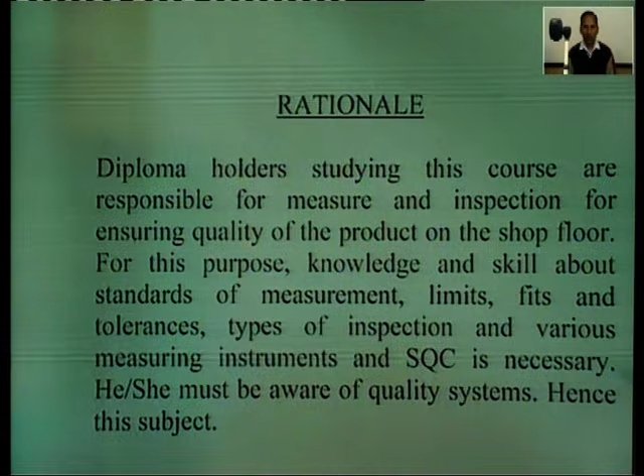So if we discuss the rationale of this subject, that is why this subject is important for the students of production and industrial engineering, then the diploma holders studying this course are responsible for measurement and inspection for ensuring quality of the product on the shop floor. For this purpose, knowledge and skill about standards of measurement, limits, fits and tolerances, types of inspection and various measuring instruments and SQC, meaning statistical quality control, is necessary. He or she must be aware of the quality system, hence this subject.

So the first topic is inspection. What is inspection? An inspection is most generally an organized examination or formal evaluation exercise. In engineering activities, inspection involves the measurements, tests and gauges applied to certain characteristics in regards to an object or activity. The results are usually compared to specified requirements and standards for determining whether the item or activity is in line with these targets. So inspections are usually non-destructive.

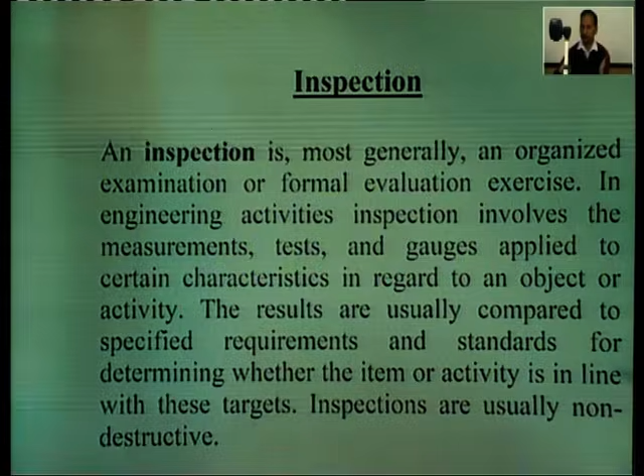A surprise inspection tends to have different results than an announced inspection. Leaders wanting to know how others in their organization perform can drop in without warning to see directly what happens. If an inspection is made known in advance, it can give people a chance to cover up or fix their mistakes, which could lead to distorted and inaccurate findings. A surprise inspection therefore gives inspectors a better picture of the typical state of the inspected object or process than an announced inspection. It also enhances external confidence in the inspection process.

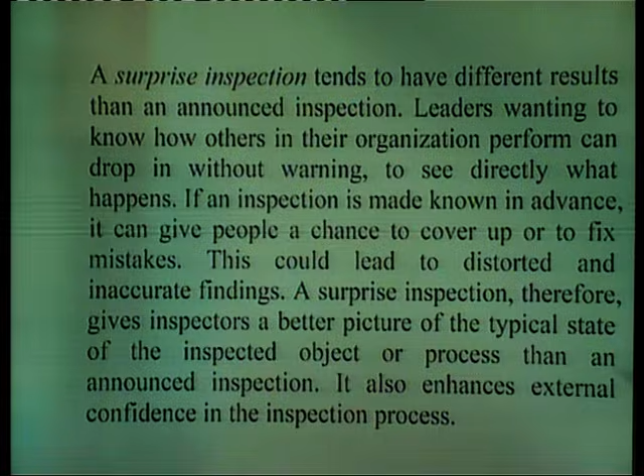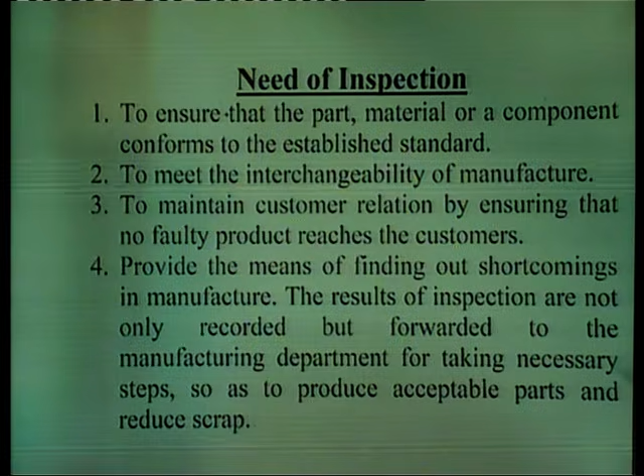Need of inspection, that is why inspection is needed in the industry. First, to ensure that the part, material or component conforms to the established standards. Second, to meet the interchangeability of manufacture. Third, to maintain customer relations by ensuring that no faulty product reaches the customers. Fourth, to provide the means of finding out shortcomings in manufacture. The results of inspection are not only recorded but forwarded to the manufacturing department for taking necessary steps so as to produce acceptable parts and reduce the scrap.

Fifth, it also helps to purchase good quality raw materials, tools and equipment which govern the quality of the finished products. Sixth, it also helps to coordinate the function of quality control, production, purchasing and other departments of the organization. Seventh, to take decisions on the defective parts, that is, to judge the possibility of making some of these parts acceptable after minor repairs.

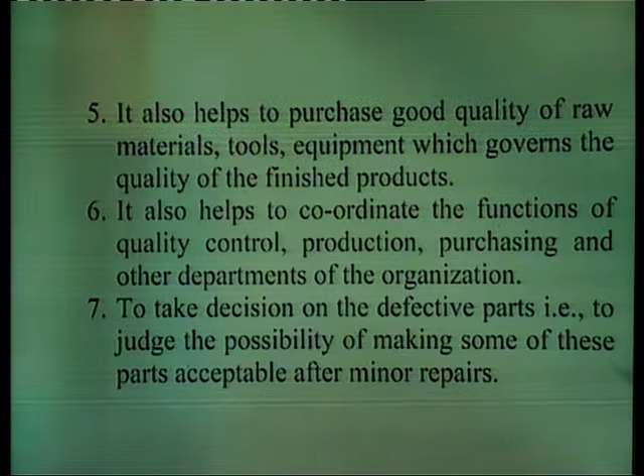The various units of measurement. A unit of measurement is a definite magnitude of a physical quantity, defined and adopted by convention and/or by law, that is used as a standard for measurement of the same physical quantity. Any other value of the physical quantity can be expressed as a simple multiple of the unit of measurement. For example, length is a physical quantity and the meter is a unit of length that represents a definite predetermined length.

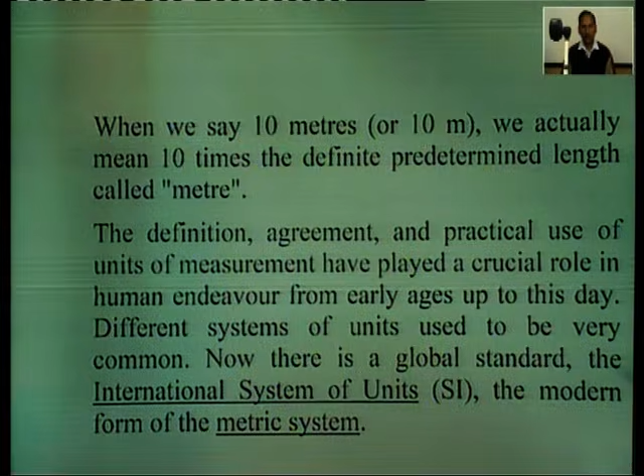So when we say 10 meters, we actually mean 10 times the definite predetermined length called the meter. The definition, agreement and practical use of units of measurement have played a crucial role in human endeavor from early ages up to this day. Different systems of units used to be very common. Now there is a global standard, the International System of Units, shortly named SI units, the modern form of the metric system which we are generally using in the industry.

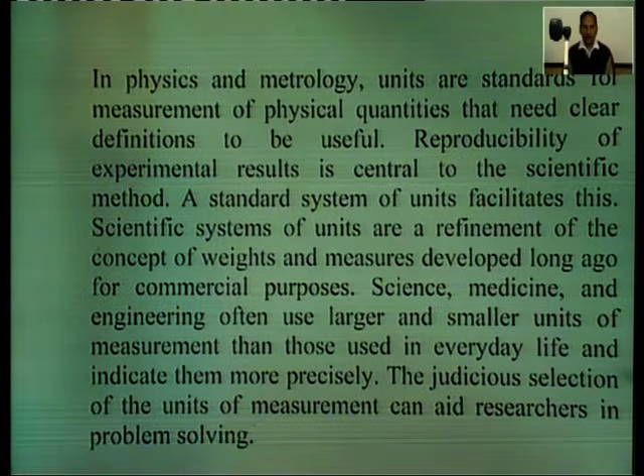In physical and metrological terms, units are standards for measurement of physical quantities that need clear definitions to be useful. Reproducibility of experimental results is central to the scientific method. A standard system of units facilitates this. Scientific systems of units are a refinement of the concept of weights and measures developed long ago for commercial purposes. Science, medicine and engineering often use larger and smaller units of measurement than those used in everyday life, to indicate them more precisely. The judicious selection of units of measurement can aid researchers in the problem-solving process.

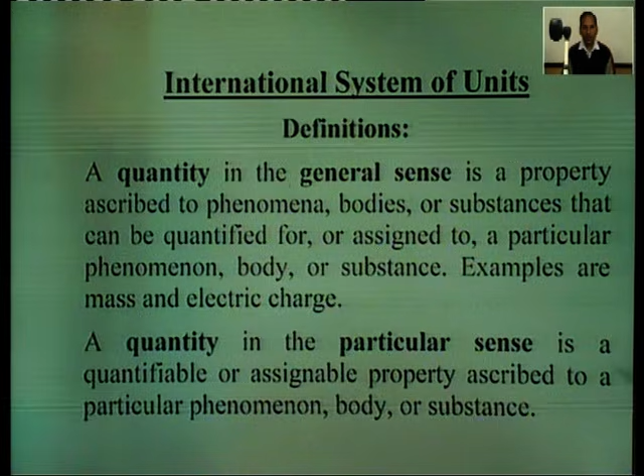So, international system of units. If we define this international system of units, the definition is: a quantity in the general sense is a property ascribed to phenomena, bodies or substances that can be quantified or assigned to a particular phenomenon, body or substance. Examples are mass and electric charge. A quantity in the particular sense is a quantifiable or assignable property ascribed to a particular phenomenon, body or substance.

Examples are the mass of the moon and the electric charge of the proton. A physical quantity is a quantity that can be used in the mathematical equations of science and technology. A unit is a particular physical quantity, defined and adopted by convention, with which particular quantities of the same kind are compared to express their values.

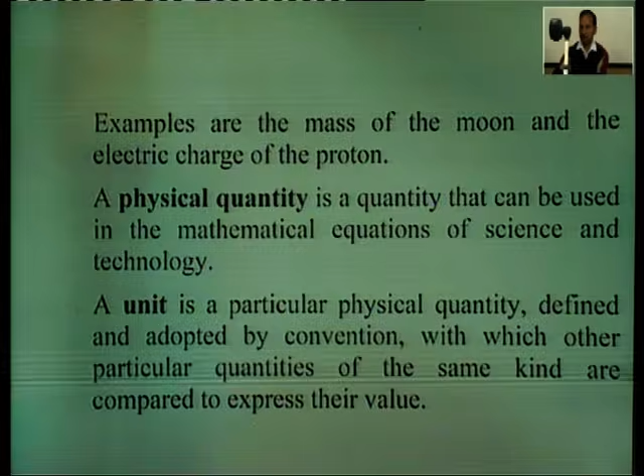Similarly, base quantity electric current has name ampere and symbol capital A. Base quantity temperature has name Kelvin and symbol capital K. Base quantity amount of substance has name mole and symbol mol. Similarly, base quantity luminous intensity has name candela and symbol small cd.

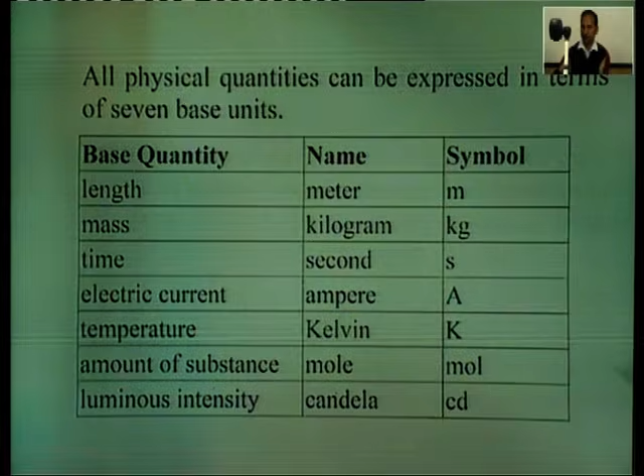Derived units: other quantities, called derived quantities, are defined in terms of the 7 base quantities via a system of quantity equations. The SI derived units of these derived quantities are obtained from these equations and the 7 SI base units. Examples of such SI derived units are given, where it should be noted that the symbol 1 for quantities of dimension 1, such as mass fraction, is generally omitted.

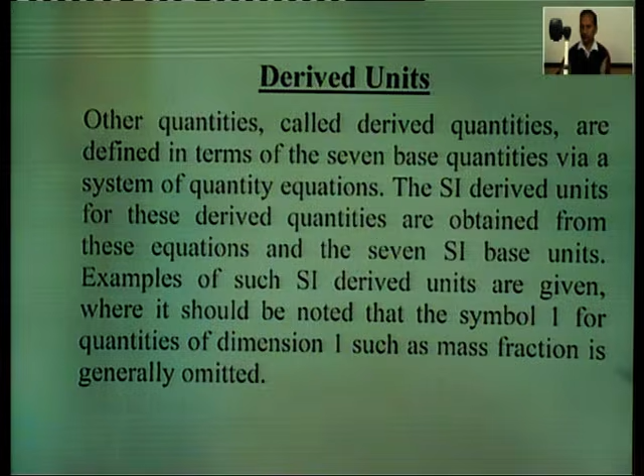Derived quantity area: name is square meters, expression in terms of SI units is small m square. Similarly, derived quantity volume: name is cubic meter, expression in terms of SI units is small m cube.

Derived quantity speed or velocity: name is meter per second, expression in SI units is small m oblique small s. Similarly, derived quantity acceleration: name is meter per second squared, expression in SI units is small m oblique small s square.

Similarly, derived quantity mass density: name is kilogram per cubic meter, and expression in terms of SI units is kg per m cube.

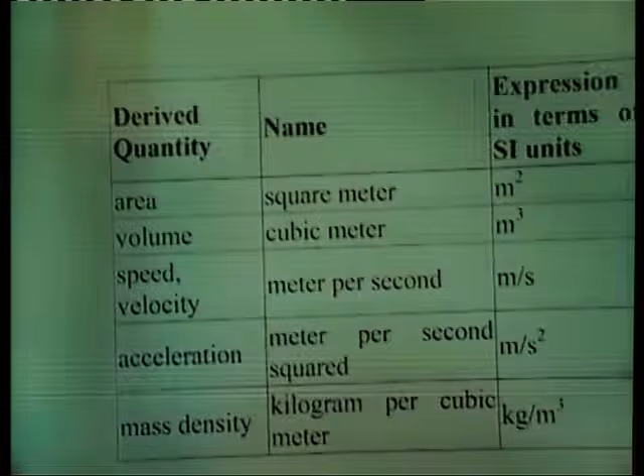Similarly, derived quantity force: name is newton or capital N, and expression in terms of SI units is m kg s raised to power minus 2.

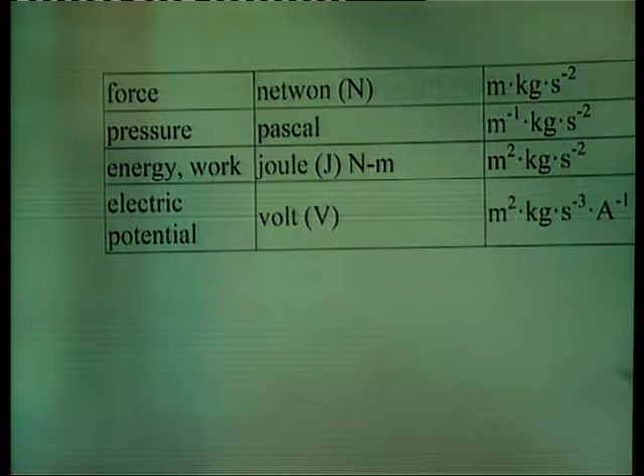Pressure: name is Pascal, symbol is small m minus 1 kg s square minus 2. Energy/work: name is joule or J, Newton meter, symbol is m square kg s raised to power minus 2. Similarly, electric potential: name is volt, capital V, symbol is m square kg s raised to power minus 3 capital A raised to power minus 1.

Standards of measurement: the laws of physics are expressed as mathematical relationships among physical quantities. Most of these quantities are derived quantities, or they can be expressed as combinations of some basic quantities. There are mainly 3 quantities in physics or mechanics: length, mass, and time.

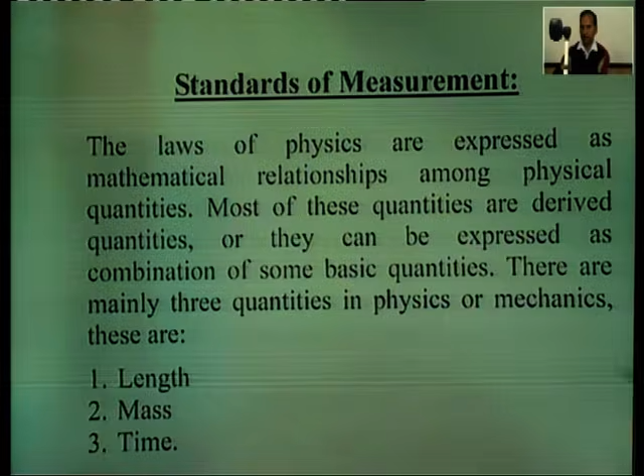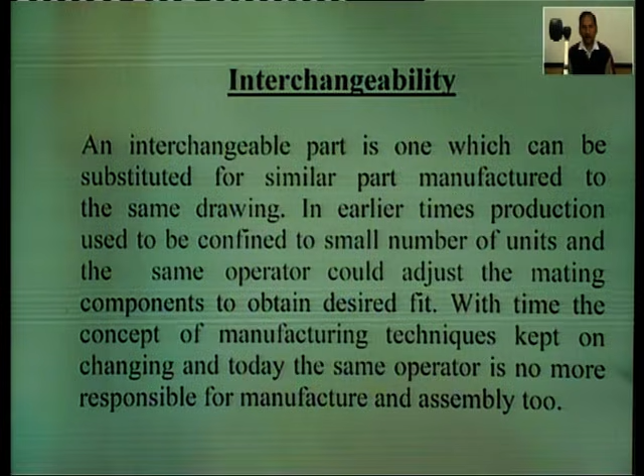With an economic-oriented approach, mass production techniques were inevitable, leading to breaking up a complete process into several smaller activities, which led to specialization. As a result, various mating components come from several shops, and even a small component would undergo production on several machines. Under such conditions, it becomes absolutely essential to have strict control over the dimensions of portions that have to match with other parts.

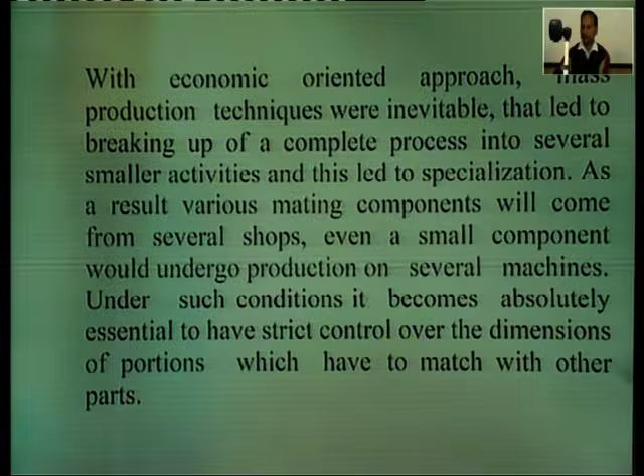So any one component selected at random should assemble correctly with any other mating component in the production line, also selected at random. When a system of this kind is ensured, it is known as an interchangeable system. Interchangeability ensures increased output with reduced production cost.

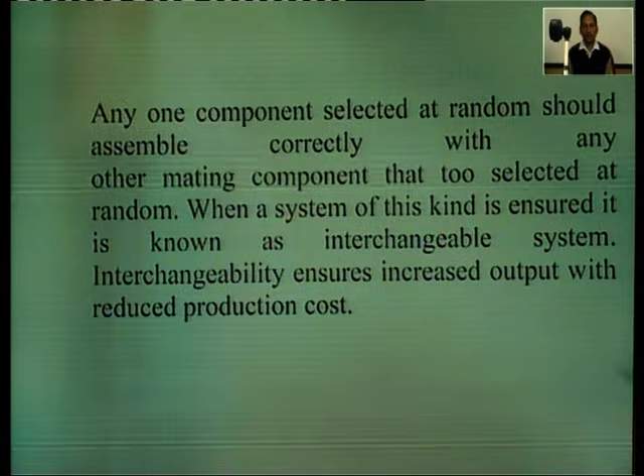Accuracy and precision: what is accuracy, what is precision, and what is the difference between the two? Accuracy is how close a measured value is to the actual or true value. Precision is how close the measured values are to each other.

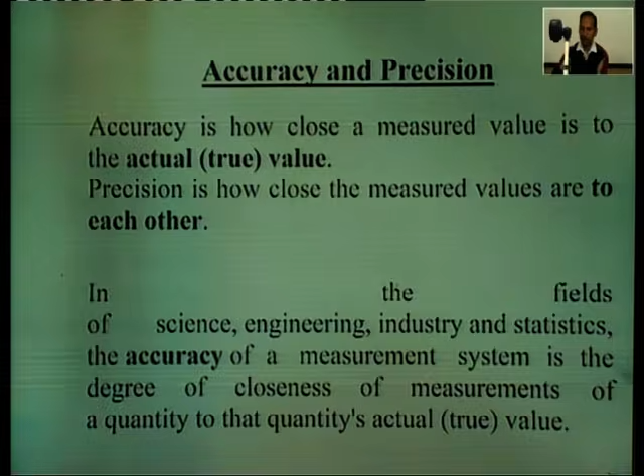In the fields of science, engineering, industry, and statistics, the accuracy of a measurement system is the degree of closeness of a measurement of a quantity to that quantity's actual or true value. The precision of a measurement system, also called reproducibility or repeatability, is the degree to which repeated measurements under unchanged conditions show the same results. Although the words reproducibility and repeatability can be synonymous in colloquial use, they are deliberately distinguished in the context of the scientific method.

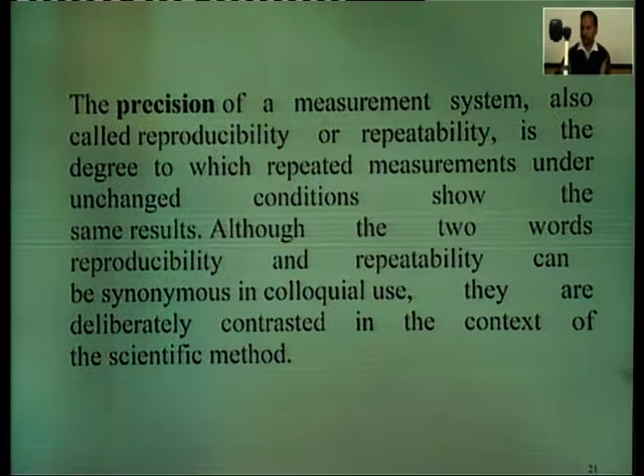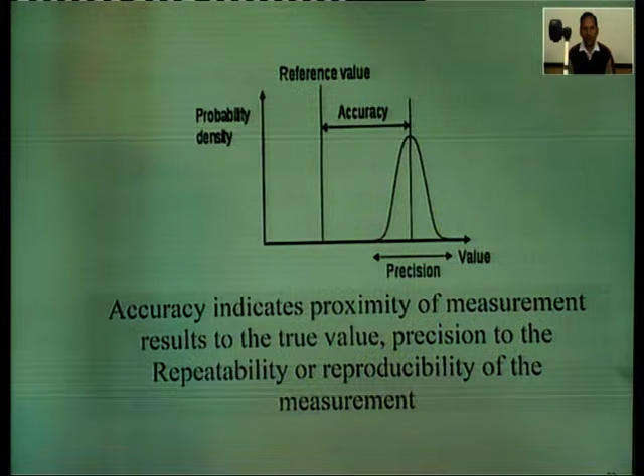Looking at this graph, on the x-axis we show the precision line, this is the precision value, and on the y-axis is the probability density. This shows the accuracy in this system. This is the reference value, and this area shows the precision of this value. So accuracy indicates proximity of measurement results to the true value, while precision indicates the repeatability or reproducibility of the measurements.

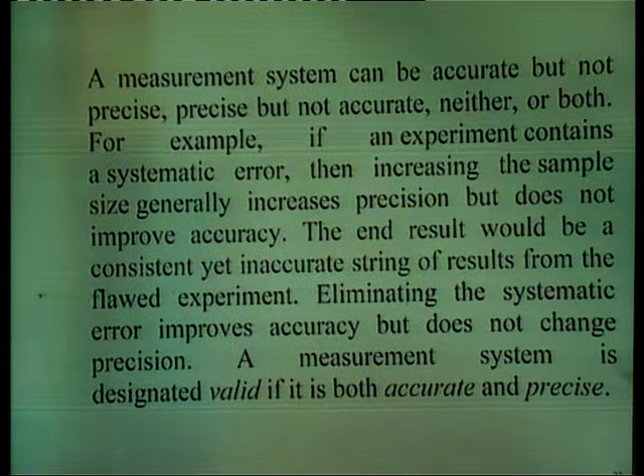A measurement system can be accurate but not precise, precise but not accurate, neither, or both. For example, if an experiment contains a systematic error, then increasing the sample size generally increases precision but does not improve accuracy. The end result would be a consistent yet inaccurate string of results from the flawed experiment. Eliminating the systematic error improves accuracy but does not change precision. A measurement system is designated valid if it is both accurate and precise.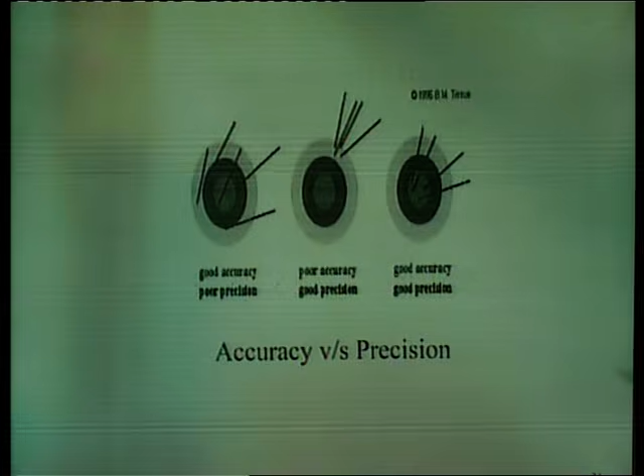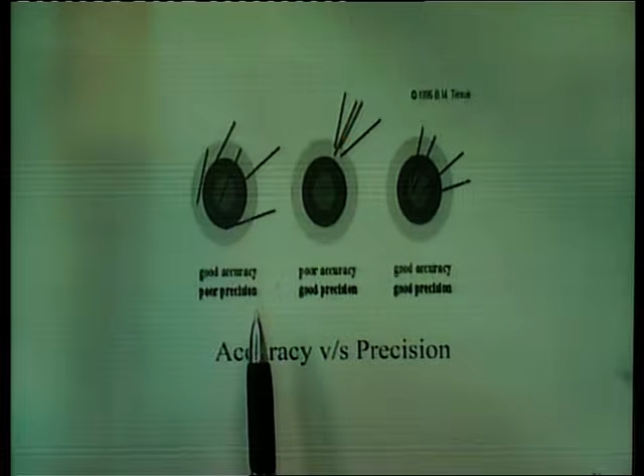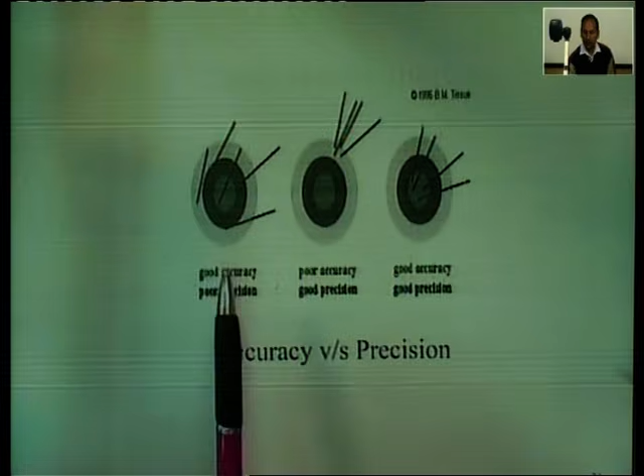Here in this diagram we compare accuracy with precision. In the first diagram, this shows good accuracy but poor precision. Here is a dart board with arrows that hit it. This is good accuracy but poor precision, because all these arrows are far away from each other.

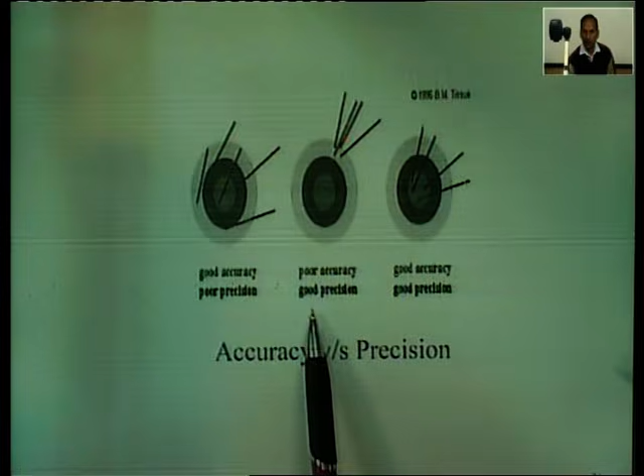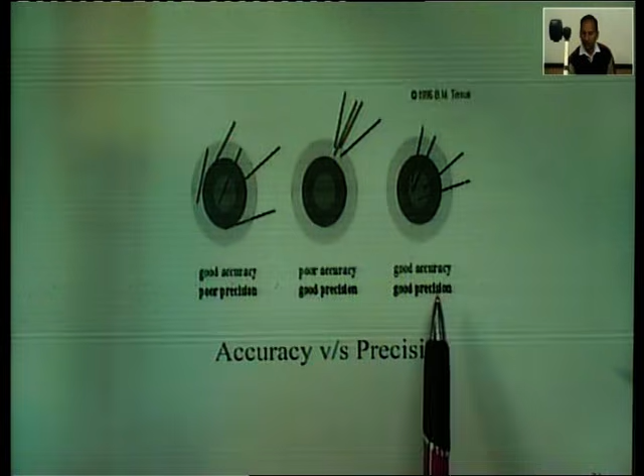Similarly, in this case we can say this is poor accuracy but good precision, because all these arrows hit one side of the dart board. In the third case, this is good accuracy and good precision, because all these arrows hit the dart board in the center point. So this is basically the difference between accuracy and precision.

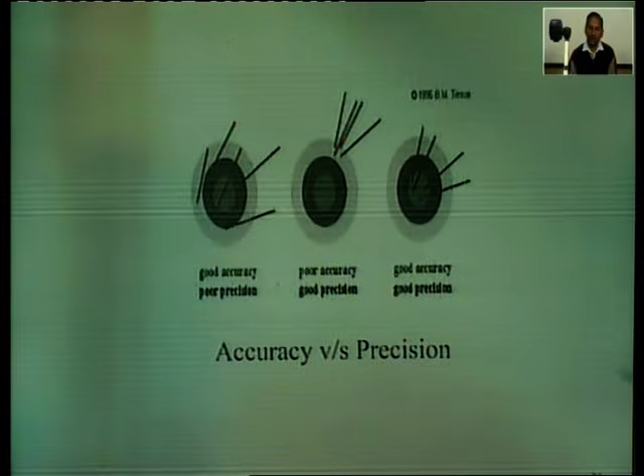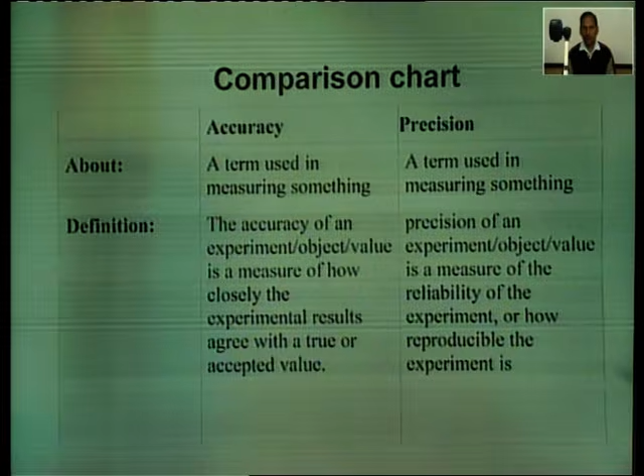If we see the measurement, in case of accuracy a single measurement is needed, while in case of precision a number of measurements are needed. If we talk about quality, the first case does not speak of the quality, while the second case speaks of the quality of the product. If we see the uses, both accuracy and precision are used in physical and engineering statistics, etc.

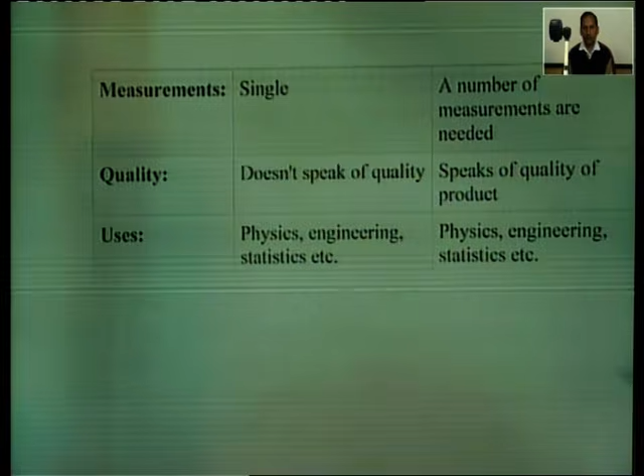Next is international standards. International standards are standards developed by international standards organizations, and are available for consideration and use worldwide. The most prominent organization is the International Organization for Standardization.

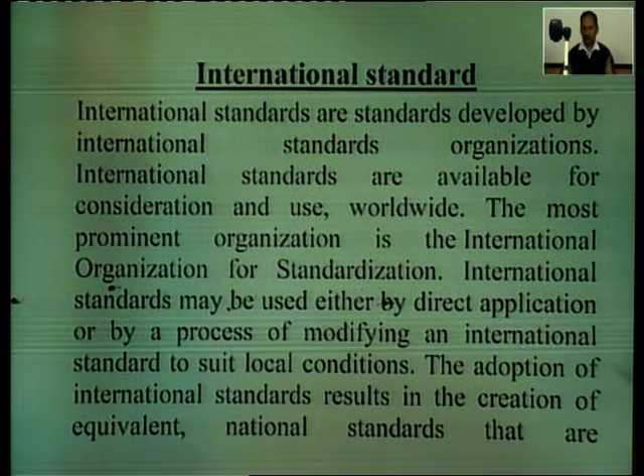International standards may be used either by direct application, or by a process of modifying international standards to suit local conditions. The adoption of international standards results in the creation of equivalent national standards that are substantially the same as international standards in technical content, but may have minor editorial differences as to appearance, use of symbols and measurement units, substitution of a point for a comma as a decimal marker, and differences resulting from conflicts in governmental regulations or industry specific requirements.

These differences are caused by fundamental climatic, geographical, technological or infrastructural factors, or the stringency of safety requirements that a given standard authority considers appropriate.

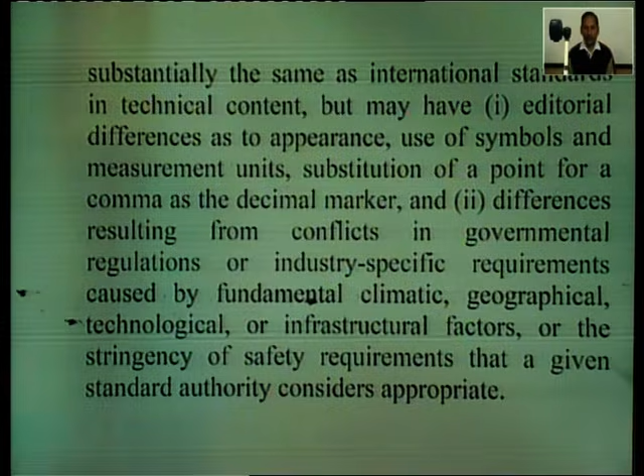International standards are one way of overcoming technical barriers in international commerce caused by differences among technical regulations and standards developed independently and separately by each nation.

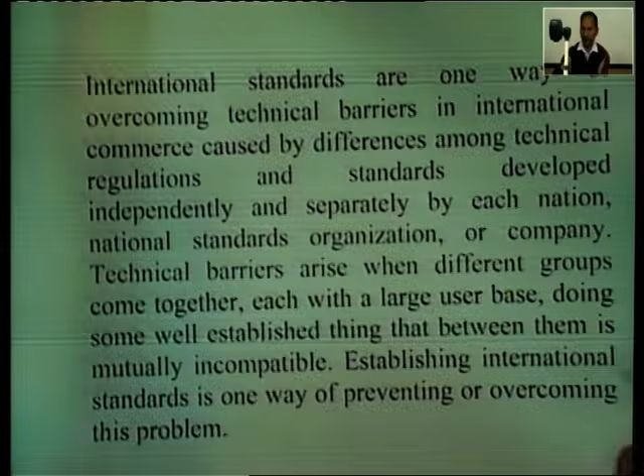Definition of the International Organization for Standardization, or ISO: the world's largest developer and publisher of international standards. The ISO is a network of the national standard institutes of 163 countries, coordinated by the Central Secretariat in Geneva. For example, in a currency context, ISO 4217 is the international standard established by the ISO that specifies the structure for the three-letter codes used to describe the many currencies used around the world.

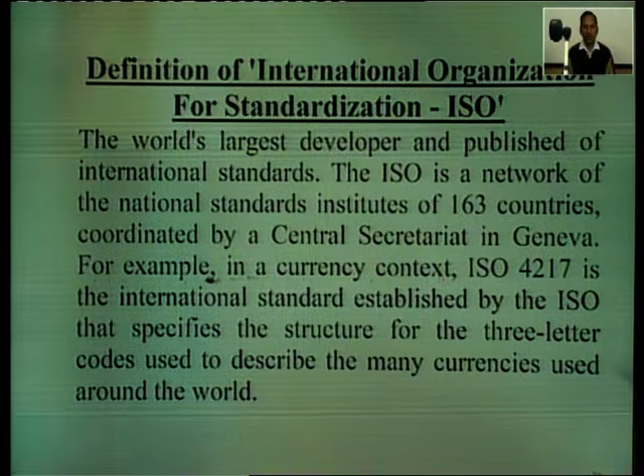Standard organizations: there are many standard organizations that establish and implement standards. Some of the most prominent are the American Petroleum Institute, shortly named API; American Society for Testing and Materials, shortly named ASTM; British Standard Institution, shortly named BSI; European Computer Manufacturer Association, shortly named ECMA; and similarly, the Institute of Electrical and Electronics Engineers, shortly named IEEE.

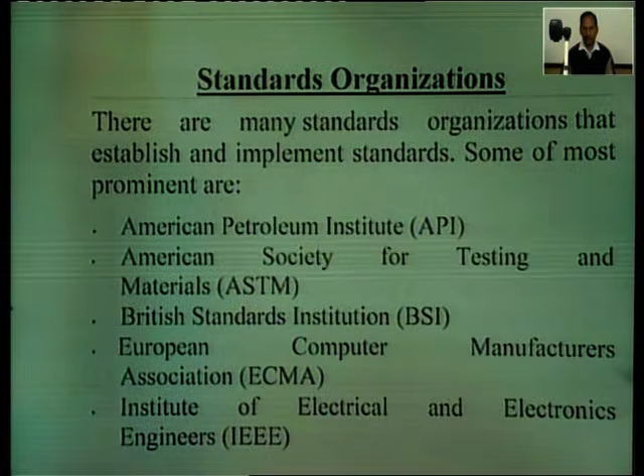International Electrotechnical Commission, shortly named IEC. International Organization for Standardization, shortly named ISO. Telecommunications Industry Association, shortly named TIA. International System of Units, shortly named SI units. International Telecommunication Union, shortly named ITU. Organization for the Advancement of Structured Information Standards, shortly named OASIS. Universal Postal Union, shortly named UPU. Society of Motion Pictures and Television Engineers, shortly named SMPTE.

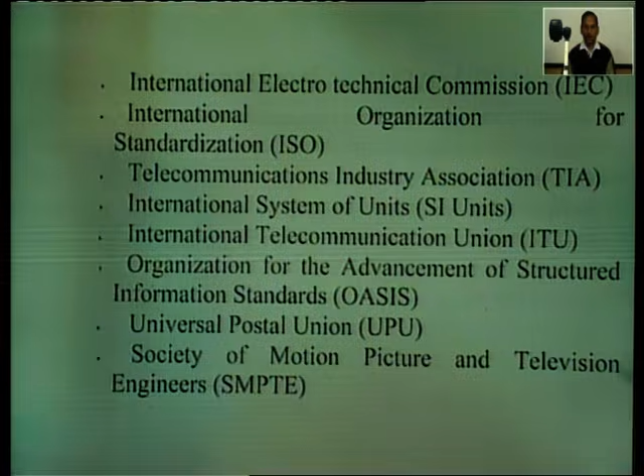International System of Units: the International System of Units, abbreviated SI from the French language, is the modern revision of the metric system. It is the world's most widely used system for measuring units, both in everyday commerce and in science. The SI was developed in 1960 from the meter-kilogram-second system, shortly named MKS system, rather than the centimeter-gram-second system, shortly named CGS system, which in turn had many variants.

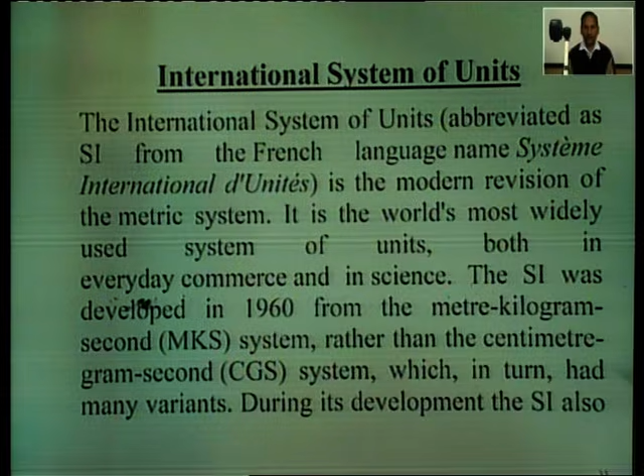During its development, the SI also introduced several newly named units that were previously not a part of the metric system.

The original SI units for the six basic physical quantities were: meter, M, the SI unit for length; second, S, the SI unit for time; kilogram, kg, the SI unit for mass; ampere, capital A, the SI unit for electric current; degree Kelvin, capital K, the SI unit for thermodynamic temperature; and candela, CD, the SI unit for luminous intensity.

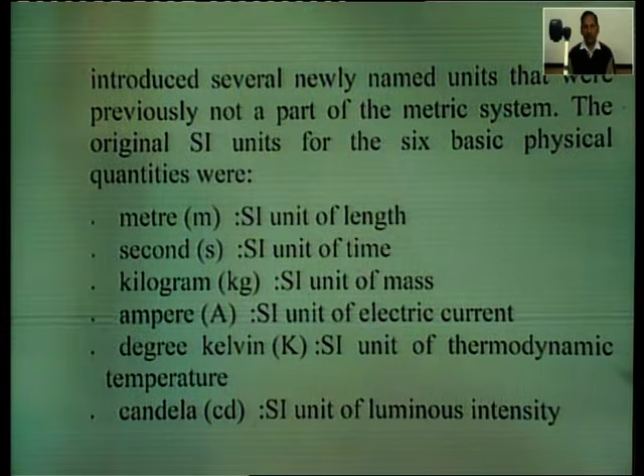The mole was subsequently added to this list, and the degree Kelvin was renamed as Kelvin.

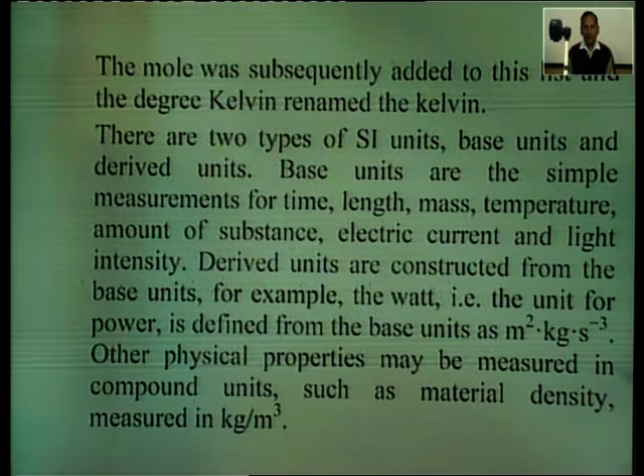There are two types of SI units: base units and derived units. Base units are the simple...